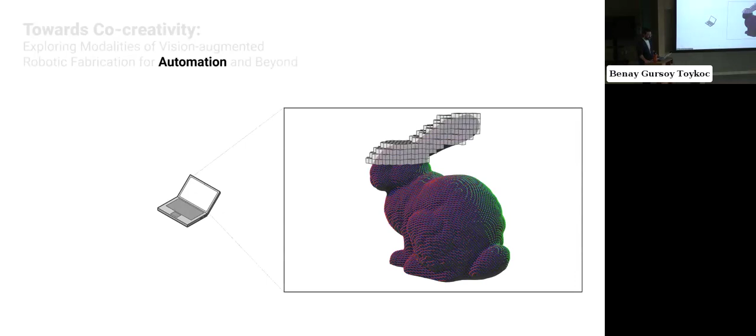But despite their advantage and prevalence, these workflows inherently rely on discrete and often abstracted representations of the design context. This very nature of these computational systems necessitates a conscious effort of defining design problems and discretizing design parameters into computable chunks, which effectively imposes a certain way of engaging with the design context. Not necessarily good or bad, but a certain, typically different, way of interacting with it.

This limitation is especially clear in digital fabrication workflows, where we rely on geometric assumptions to represent the environments we operate in and the materials we engage with. However, these assumptions rarely reflect the true state of the material context and present significant limitations, even when we're using the most advanced robotic manipulators.

Even in an optimal case, where we're using highly engineered materials and well-established fabrication techniques, the materialization quality still remains indeterminate, as the inherent material behavior and the complex tool-material interactions present a wide range of uncertainties.

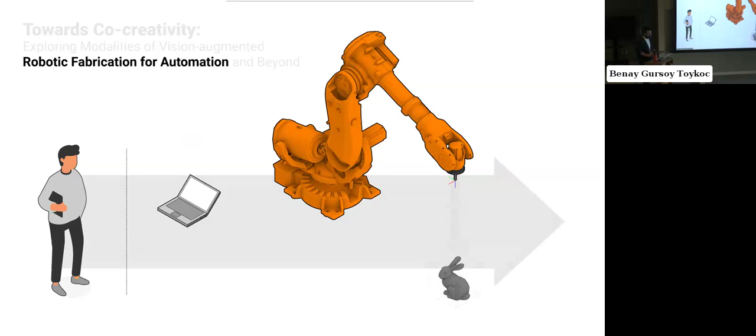To compound this further, due to the reliance on unidirectional flow of information from ideation to representation to materialization, these systems cannot facilitate the level of adaptability inherent in how we engage with design and materialization problems through a series of seeing, acting, and seeing.

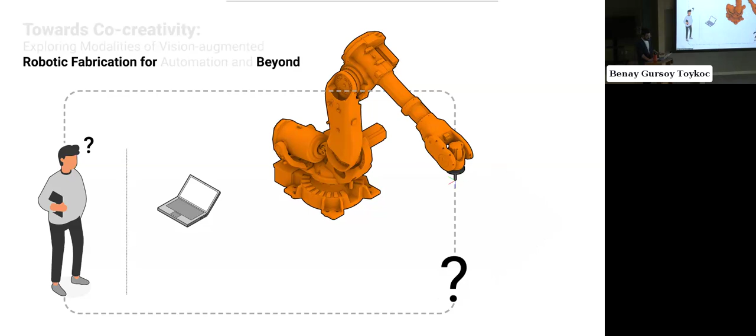This lack of adaptability to the material context creates major challenges for using these systems beyond simple automation. When the final design is uncertain, or the quality of materialization is unpredictable due to complex material behavior, these systems struggle very much. Such situations might include hands-on exploration of material properties or affordances, or using non-standard materials and fabrication techniques, which inherently conflict with the abstract and rigid nature of computational systems.

Within this problem definition, I'm interested in the recently emerging concept of co-creativity within the scope of materialization processes. Drawing from human-computer interaction literature, this paradigm reconsiders computational systems as active agents capable of inferring operational context and appropriately adjusting the computational hypothesis. In simpler terms, my dissertation advocates for computational augmentation of robotic fabrication systems to elevate these systems beyond mere executors of predefined tasks.

In simpler terms, my dissertation advocates for computational augmentation of robotic fabrication systems to elevate these systems beyond mere executors of predefined tasks into adaptive collaborators capable of sensing and responding to the material context.

Especially with recent advancements in sensing technologies, deep learning-based perception models, and heuristically learned action policies, the current technological landscape presents rich grounds for exploring more adaptable and responsive computational systems. However, when it comes to manipulating the physical world, these novel computational approaches are still at an experimental stage, often dealing with what's called toy problems. Therefore, achieving co-creativity in materialization scenarios is a distant but rapidly approaching goal, which guides my exploration of advanced robotic fabrication workflows that can respond to intricacies of the material context.

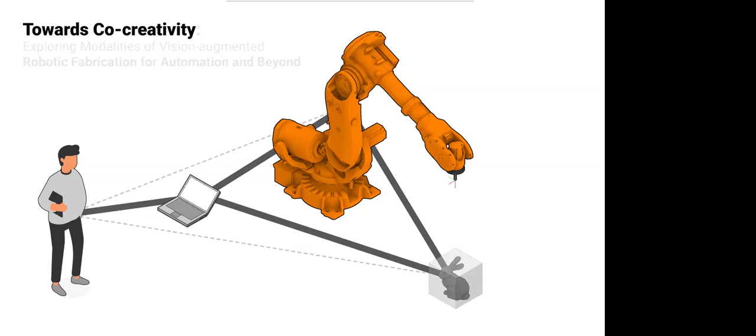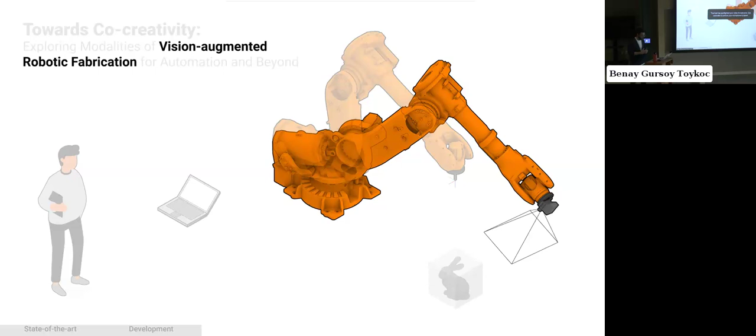Within the scope of this dissertation, my focus explores how to create computational feedback loops that connect digital representation, robotic materialization, and most importantly, the material context, all overseen by a human agent. To achieve this, my primary focus has been integrating computer vision methodologies into robotic fabrication workflows to facilitate an intrinsic representation of the environment for informed tooling operations. In the coming sections, I'll present my findings on state-of-the-art applications and discuss the development of the computational systems that enable such augmentation.

Within the scope of my dissertation work, I delineate three modalities in which vision-based sensing paradigms can augment existing materialization scenarios. The first of these modalities is informing computational systems of the existing material context. Within this scope, I explore how accurately and reliably we can sense the environment, identify key operational parameters and computational strategies for effective deployment, and demonstrate scalability to large-scale applications.

The second modality involves adapting tooling operations based on the captured state of the environment and responding to changes happening within the work cell. This section explores fabrication feasibility for both small and large-scale applications and develops computational strategies necessary for effective materialization.

And the last modality focuses on using vision-based sensing to capture the materialized artifacts and assess the quality of materialization. I explore its feasibility in high-precision monitoring tasks and quantifying material behavior in novel fabrication scenarios.

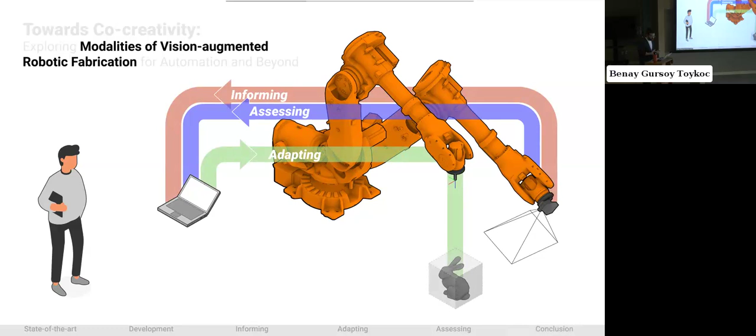Cumulatively, these three modalities mimic the see, sense, act, see paradigm in how we engage with the material and design context, aiming to facilitate a more adaptive and iterative digital fabrication workflow. Moreover, this framework structures how the research outcomes will be presented today. Although this is a compilation-style dissertation where each chapter corresponds to a published or under-review paper, these modalities were essential for meaningfully situating my findings.

Starting with the state-of-the-art applications employing vision-based sensing, the systematic literature review presented as part of this dissertation adopts a rigorous search keyword framework. This approach has been critical in adequately surveying this emerging field, which currently lacks coherence in terminology. This search resulted in 94 papers dispersed worldwide with a significant concentration of efforts in Central and Northern Europe, as well as North America.

Despite the fact that no date limits were set in our search, the selected corpus indicates that this area of focus emerged in the early 2010s, coinciding with the commercial availability of computer vision hardware like Microsoft Kinect, as well as open source efforts that support it.

From 2012 onwards, we see a significant increase in research output, with conferences being the most prominent outlet, highlighting the rapid pace of progression in the field. However, there's a significant shift towards more thorough delineation of findings through more extensive journal publications in the past few years.

In analyzing this corpus, this literature review presents a Vision-Augmented Robotic Fabrication framework, which identifies and delineates implementation and operation considerations critical to effective deployment of these systems.

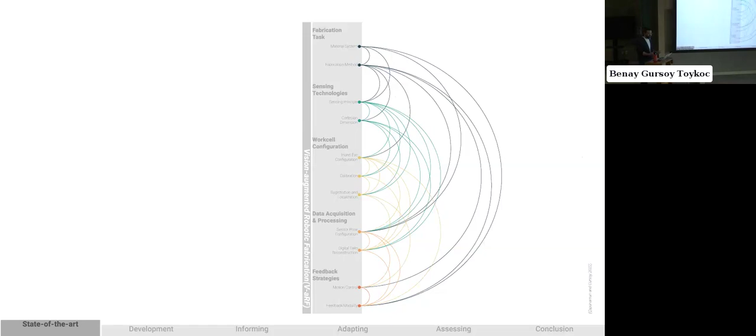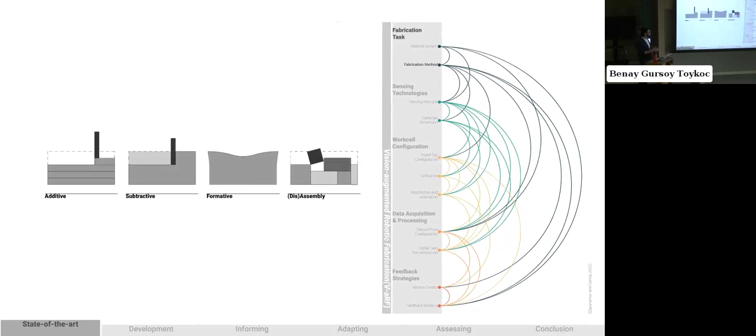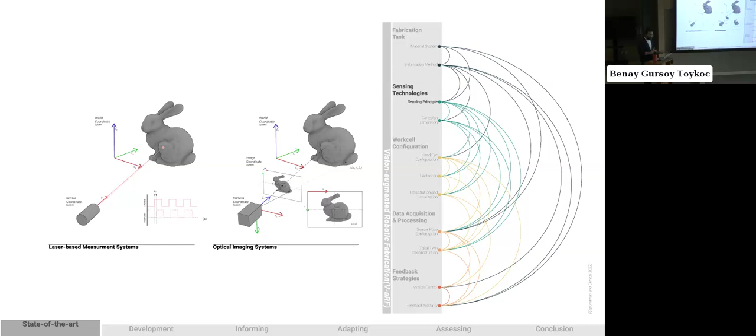Within this framework, the selected precedents are categorized by their fabrication methods as additive, subtractive, formative, and disassembly/assembly. Similarly, sensing technologies are also grouped based on their sensing principle as laser-based measurements and optical imaging systems.

Moving on to operational configurations, this literature review examines how sensing hardware is employed within the robotic work cell. Here, my categorization borrows from the literature in robotics, where these configurations are typically divided into eye-in-hand or eye-to-hand configurations.

In addition, I define common computational strategies to accurately register spatial information with respect to a known coordinate frame, such as the robot base.

Regarding how the environment is sampled in these precedents, I categorize the identified strategies based on the permitted degrees of freedom between camera poses, as shown here.

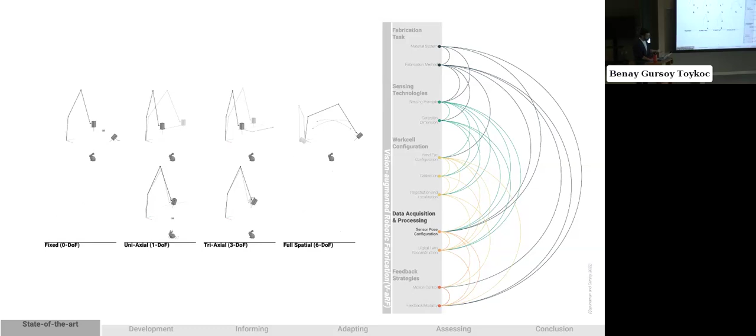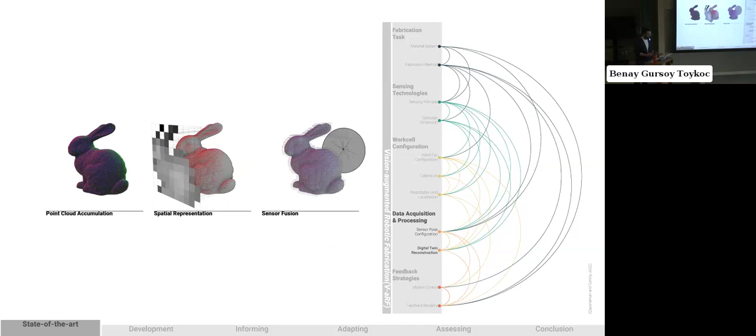Especially in applications where the environment is sampled using more than one camera pose, the integration of these spatial data becomes very critical. Here, this literature review also identifies high-level strategies adopted in the corpus, such as point cloud accumulation, spatial representations, and sensor fusion algorithms.

Lastly, I categorize the modalities in which these robotic fabrication systems operate as deterministic, or single cycle, iterative or multi-cycle, and continuous or real-time.

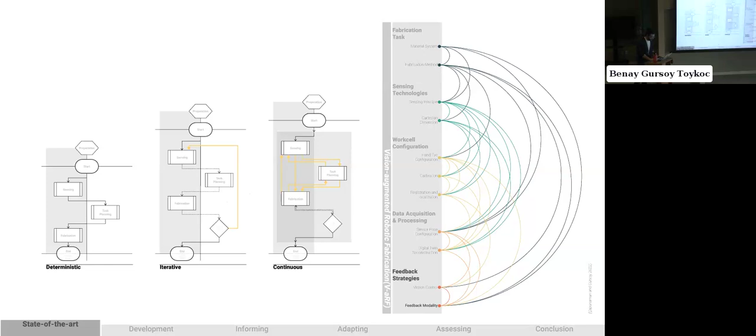Through this detailed examination of the state-of-the-art methodologies and strategies, I identified several gaps in knowledge, including inadequate discussion of computational systems and strategies, limited systematic investigation into operational parameters, scarcity of quantitative assessment of perception accuracy, and lack of open source implementation for better replicability. These findings inform the development of the vision-based sensing framework presented in this dissertation.

As part of this development stage, I developed and prototyped a hardware assembly, which includes an NVIDIA Jetson edge computing device and a Microsoft Azure Kinect developer kit. This allowed us to interface with the robot using Jetson's digital pins to ensure synchronized acquisition of data at precise camera poses.

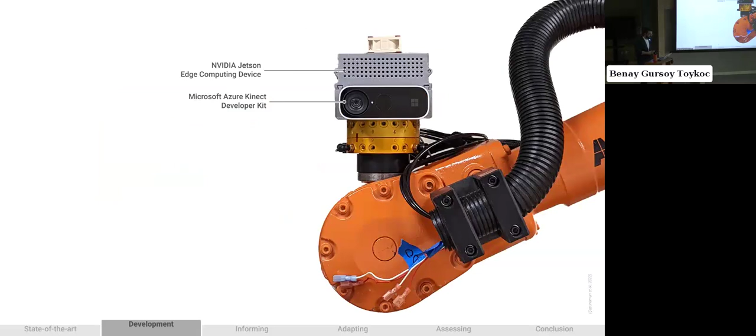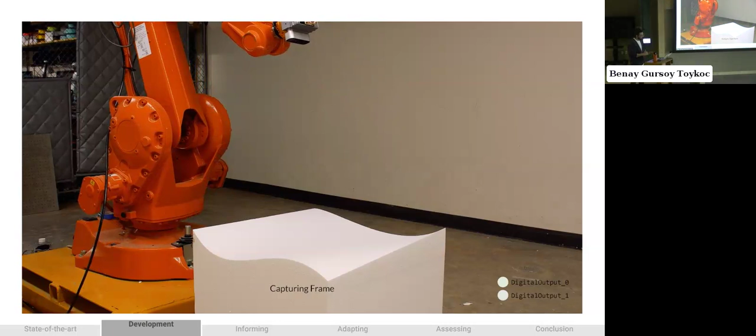Here you can see an example run with the camera assembly. At the bottom, you can see the digital signals in real time and the state of the scanning procedure. In this example, digital output 0 triggers the start and end of a scanning procedure, while digital output 1 is used to capture an individual frame at a known position.

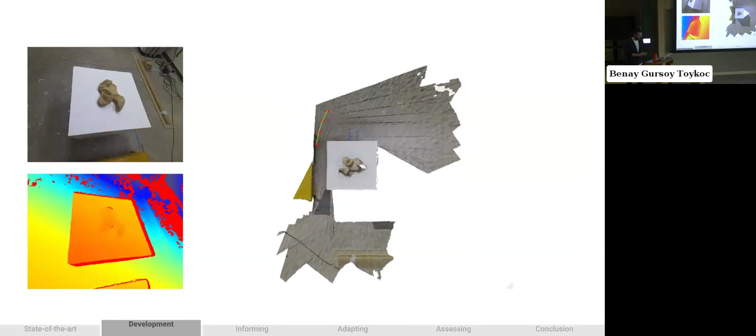And the other major leg of this development process was the scene reconstruction algorithm. For this challenge, I opted for a voxel-based integration algorithm developed by my collaborator Wei Dong as part of his PhD dissertation. This approach was critical in the success of this development phase, as it utilizes hardware acceleration for efficient integration of multi-view spatial data, as exemplified here.

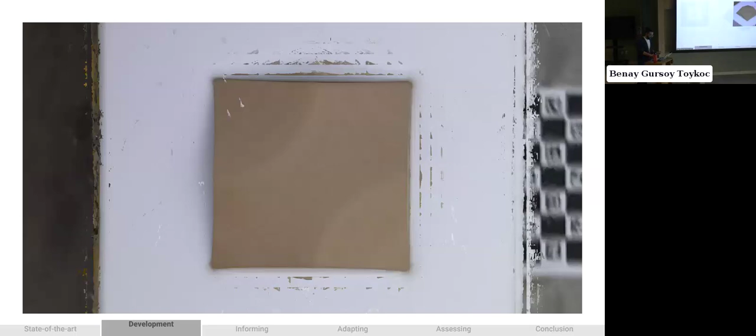However, this integration algorithm alone is not quite enough to produce operable geometries needed for toolpath generation and so on. Here you can see some of the artifacts caused by sensor noise and imprecision in sensor pose estimation during the integration process. Luckily, this is a well-studied problem in the field of computer graphics, and by using an outlier removal algorithm, I was able to achieve clean geometries.

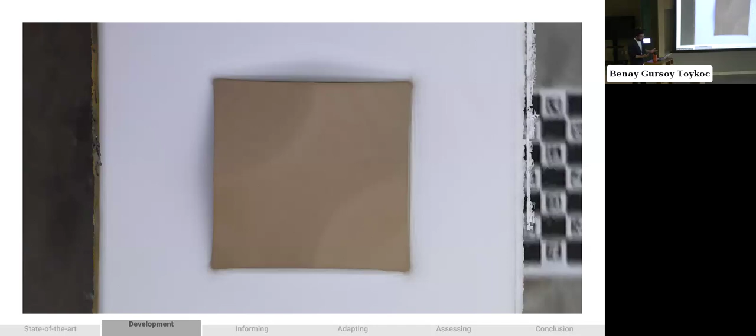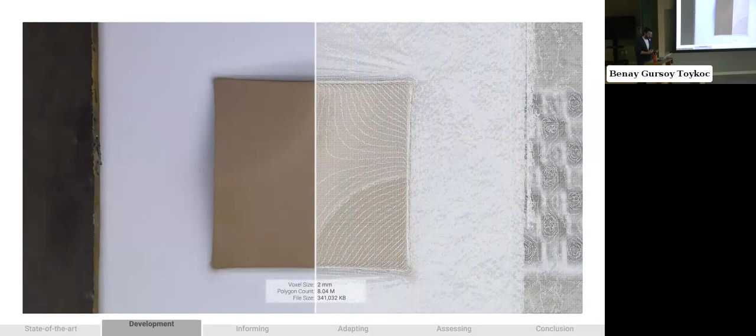And if we were to look closely at this mesh, we can see that the details are very well preserved, successfully capturing the overall geometry. This particular output is reconstructed using a voxel size of 2 millimeters and consists of more than 8 million polygons for the whole scene. And for those of you who do not really deal with mesh geometries on a regular basis, that's a lot of faces.

Luckily, this spatial hashing approach allows for tuning of reconstruction resolution to match the accuracy needs of specific contexts. As we can change the voxel sizes, the flexibility presents significant advantages both in terms of computational efficiency and scalability at large. This successful implementation of hardware and software components marked the first major milestone of my dissertation research, setting the stage for extensive exploration of its capabilities.

Following this development stage, this vision-based sensing framework was validated across different material systems and fabrication scales. From left to right, the first journal publication included in this dissertation investigates the accuracy of digital twin reconstructions and fabrication feasibility of informed tooling operations at small scale.

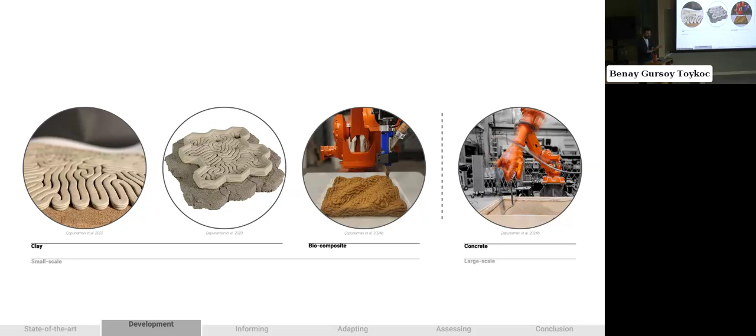Next, conference proceedings explore the use of reconfigurable and reusable formworks enabled by vision feedback through a proof of concept case study. The third conference proceeding integrates vision-based sensing to quantify post-fabrication deformation of mycelium-based biocomposites as part of an internal collaboration at Format Lab. And lastly, as part of the collaboration with the AdCon lab at Penn State, a large-scale validation study explores operational scalability to large-scale 3D printing concrete applications.

Within the scope of this first modality identified as part of my dissertation, my goal was to assess the reconstruction accuracy and reliability, as well as to identify operational parameters and develop computational strategies. The research questions guiding this investigation are: how accurately can we sense and digitally reconstruct the work environment? How do operational variables impact the accuracy and reliability? How effectively can these strategies be scaled to large-scale applications?

To methodically assess the validity of the system that I developed, I also developed an experimental methodology comparing robotically fabricated surfaces against both the scanned mesh as well as the original NURBS surface. Here, the goal is to infer both the accuracy of robotic materialization and respective digital reconstructions, effectively investigating whether vision-based sensing feedback can match or beat our assumptions about the material context.

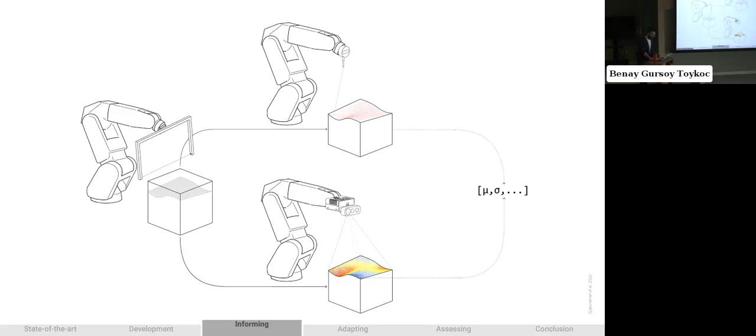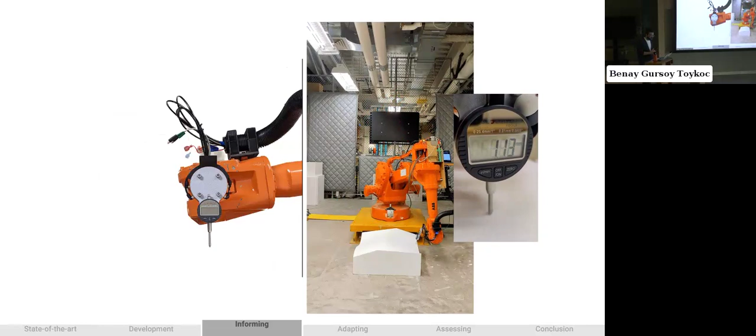Using a hot wire cutter, we first fabricated surface geometries out of a 60 centimeter by 60 centimeter EPS foam block as shown here. These surfaces were then probed with a contact-based measurement approach using a digital dial indicator with an accuracy of 0.01 millimeters, densely sampling the surface roughly every 15 millimeters along cardinal axes. All the target points were programmed to probe 10 millimeters deep to allow for measuring signed error within the measurement range of the digital dial indicator.

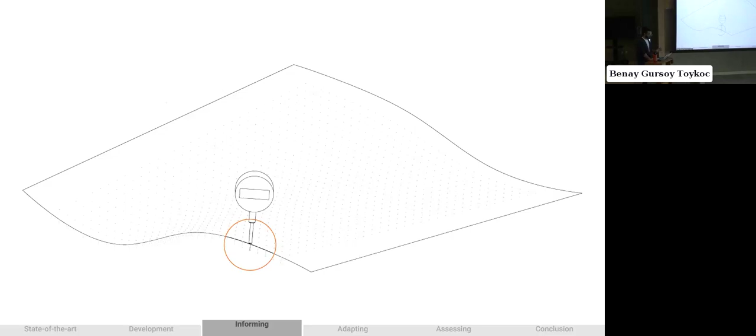If we take a closer look at an individual robot target, we can see that the discrepancy between the known offset amount and the measurements taken from the dial probe gives us the error between the digital master and the physical surface. And by projecting these points along the surface normal vector, we can also calculate the error between the reconstructed mesh and the physical surface as well.

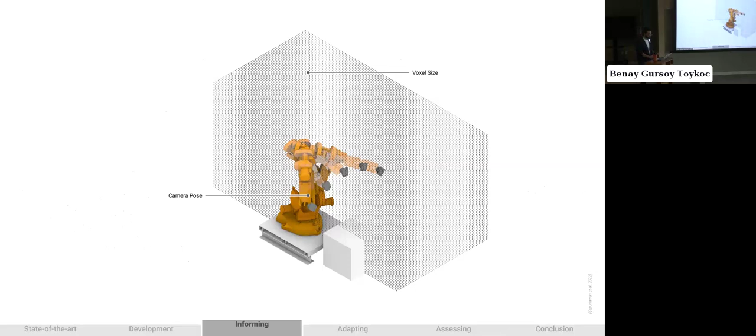Using this methodology, we investigated two operational and computational parameters, namely the effect of camera pose count and voxel sizes on reconstruction quality. To systematically explore camera pose density, we adopted a hemispherical scan trajectory with ample distance between the scanned surface and the camera to avoid any clipping of spatial information due to hardware intrinsic limitations. This hemispherical scan trajectory was defined by angles scanned in YZ and XZ planes to 60 and 90 degrees respectively for robot posability, with camera pose densities ranging from sparse 2x2 capture all the way up to 16 by 16 captures.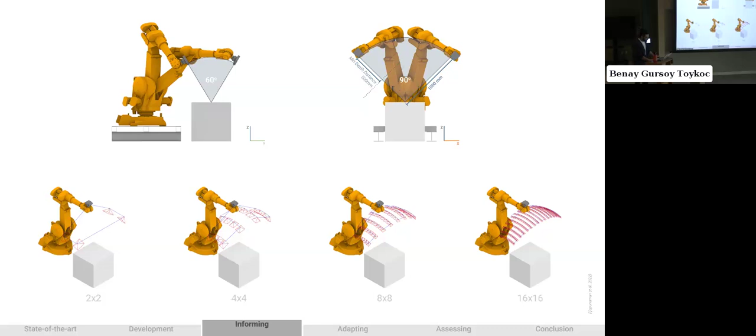As for the reconstruction resolution, we describe the unit voxel size as the number of divisions per unit length. Here, a single voxel represents the smallest computable unit in which we operate.

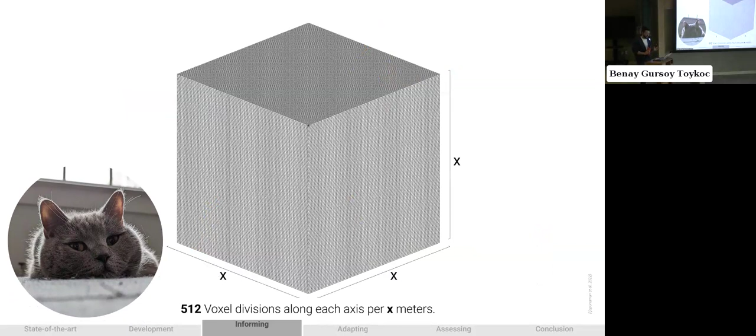And there is also my cat voxel, which is like the silliest and tiniest unit in my life, but that's a whole topic for another presentation.

Coming back to today's topic, we define a single voxel size as x over 512 meters. In our experiments, we use x values of 1, 1.5, and 2 meters, which corresponds to roughly 1.9, 2.9, and 3.9 millimeter resolution accuracy, respectively.

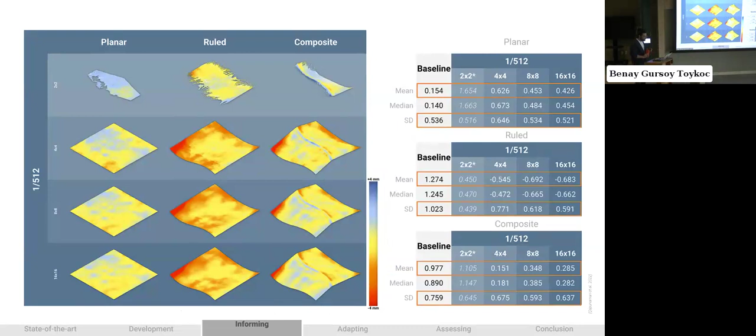Here you can see the visualization of a reconstructed mesh colored by distance to the probed points. With this color mapping, the color yellow indicates no deviation, and the colors blue and red represent deviation in positive and negative directions along the surface normal, respectively.

Here we see that as the number of poses gets larger, we achieve much closer results to the physical surface, as we would expect. However, beyond the 8x8 pose configuration, at least in the scale that we were working at, we observed diminishing returns in accuracy gains. From these results, we can infer that the reconstructed meshes provide as good or better results when compared to the assumptions that the physical surface is true to its digital master.

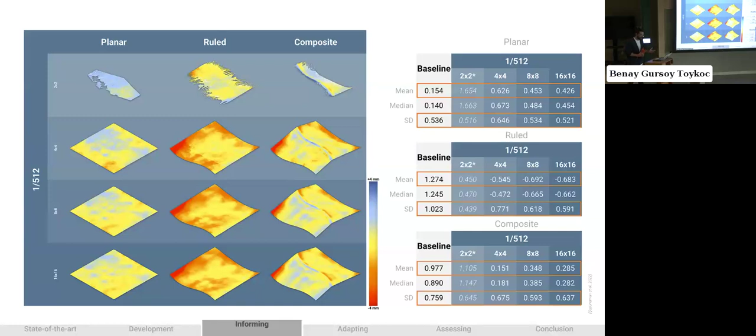Building upon this solid foundation, our collaboration with Adcon Lab at Penn State explored how vision-based sensing systems operate in large-scale 3D printing concrete applications in an emulated, still controlled environment, with emulated site conditions using sand and gravel print surfaces.

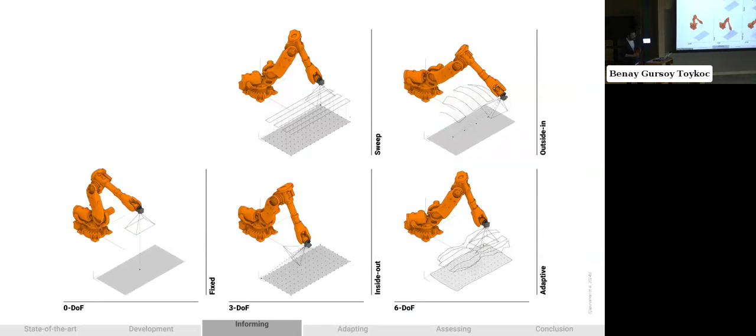This shift in scale is challenging, not only due to the increase in the volume of spatial data, but also because the sheer scale of the application necessitates careful consideration of how the material context is captured.

To systematically explore environment sensing strategies, I structured this investigation based on the permitted degrees of freedom between distinct camera poses, developing 5 sampling strategies as presented here, tailored for 3D concrete printing applications.

Here, the fixed strategy mimics a static placement of the sensing hardware looking top-down to cover the entire aggregate bed at once. The sweep strategy utilizes pure translation motion between poses and isolates the translational accuracy of the robotic arm.

The inside-out strategy primarily relies on rotation around a single point to capture the robotic work cell with minimal kinematic reconfigurations. The outside-in strategy utilizes a hemispherical trajectory, sampling the aggregate bed, looking at 4 points along the major axis of the aggregate bed, aiming to maximize pose variability.

Lastly, the adaptive strategy uses a coarser reconstruction of the aggregate bed to optimally place the sensing hardware in terms of distance and angle to the scanned surface.

Both the sand and gravel print surfaces were scanned across these different strategies, as well as different camera field of view configurations.

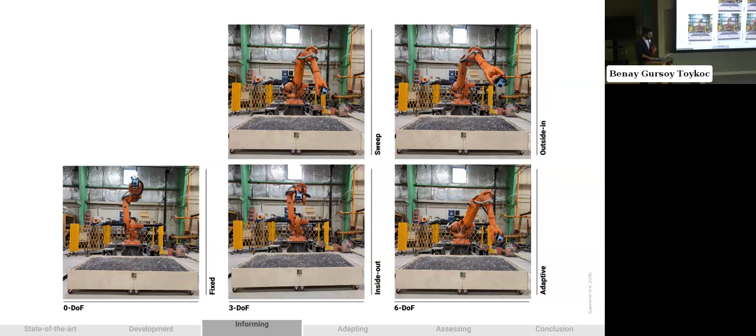But beyond the geometric complexity of these arbitrarily shaped print surfaces, the difference in aggregate size also poses significant challenges in accurately inferring depth, also due to limitations in sensing hardware.

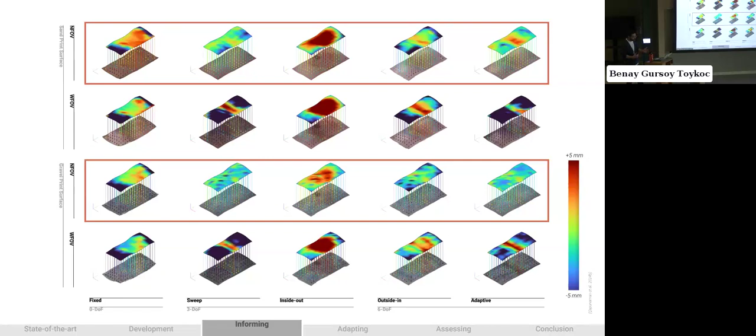And lastly, the outside-in approach presents compelling accuracy results along the major sampling axis, but this accuracy rapidly declines as we move away from the central region.

In addition to sensing strategies, we also tested computational and operational scalability of this framework by systematically reducing the reconstruction resolution and the number of poses. Similar to our previous findings, we observed comparable results despite the reduced computational complexity of the digital twin representation.

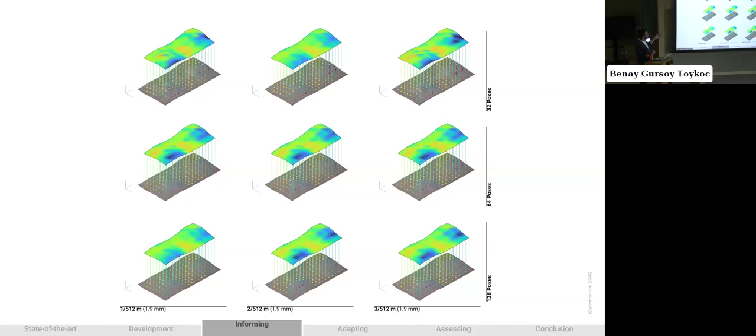Even at a quarter the pose density and a third the resolution shown on the top right, the result is fairly comparable to the original data sets on the bottom left, which uses 128 poses and 1.9 millimeters voxel size.

Going back to the research questions guiding this exploration, I can safely say that the contact-based validation methodology presented here provides a robust baseline to assess digital twin reconstructions. Material, computational, and operational parameters are critically important in adequately sensing the material context and require thoughtful consideration. Lastly, the presented framework is well capable of operating in large-scale applications with high computational efficiency. However, this transition necessitates additional computational strategies to address scale-related complications.

Moving on to adapting, as part of this second modality explored within this dissertation, I explored how the inferred geometric information can be used to inform robotic fabrication tasks and conform tooling operations to existing conditions. Here, my investigations were guided by: one, how feasible is vision-informed conformal tooling on unknown surfaces? Two, what kind of opportunities do such advanced tooling capabilities hold? And three, is this conformal tooling strategy feasible in large-scale applications?

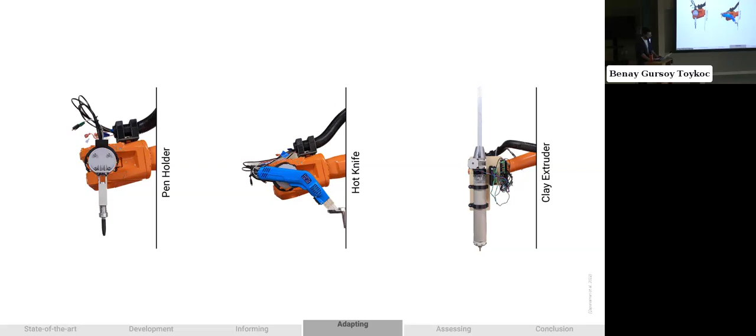As part of the small-scale validation study, we explored various tooling operations, including pen plotting, hot knife carving, and 3D printing clay as an early investigation into this capability. Using these end-of-arm tools, we ran simple tool paths across the surface, shown here as an early investigation of how feasible fabrication is with this tool path approach. Although we observed minor deviations in 3D printed layer heights and plunge depths for carving tasks, these deviations were actually consistent with the regions that exhibited lower reconstruction accuracy anyway.

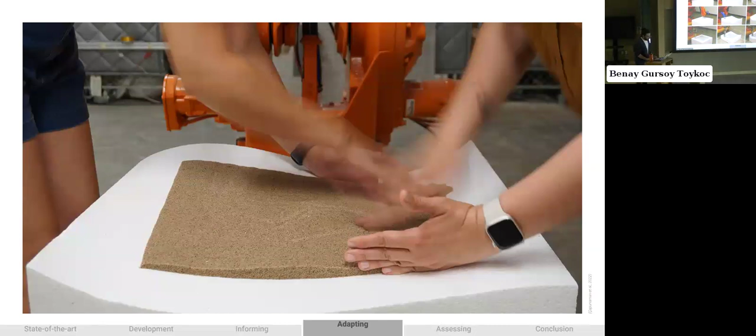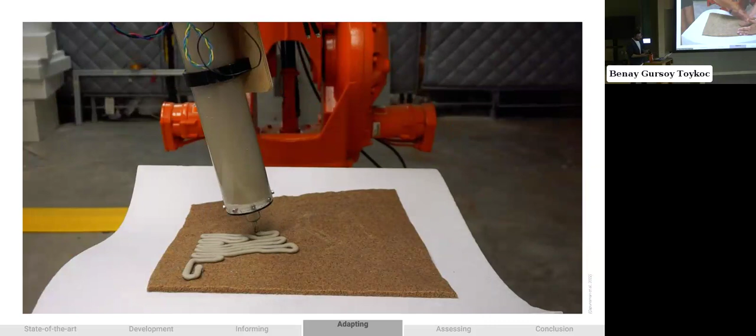However, to add another layer of complexity, we—meaning me, Benay, Paniz—all got our hands dirty and created an arbitrarily shaped surface just to test the system on a more challenging topology. This surface was then scanned to inform conformal material deposition using a differential growth curve algorithm. In line with other tooling tests on known surfaces, this was also a major success where we were able to 3D print on the unknown surface geometry with high precision.

Here you can see the final printed artifact, and during the printing process we observed consistent material deposition with no visible over or under extrusion across the entire print trajectory, even at 4 millimeters layer height that we were operating in.

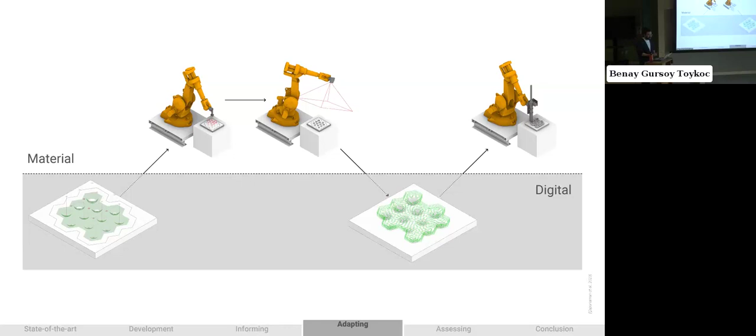Finding out this newly found capability, to further explore this newly introduced capability of conformal material deposition on digitally unknown surfaces, we conducted a follow-up study that investigates how vision-augmented robotic fabrication workflows enable adoption of reconfigurable and reusable sand formworks. Here, the robot is used to parametrically manipulate the reconfigurable sand formwork, capture the resulting material expression, and use this geometric information to adapt tooling operations.

As part of this case study, we adopted a very simple modular wall section design as a proof of concept, informed by the constraints in available extruder and the ceramic firing kilns. Out of these panels, we selected one characterized by a wide range of plunge depths as shown here.

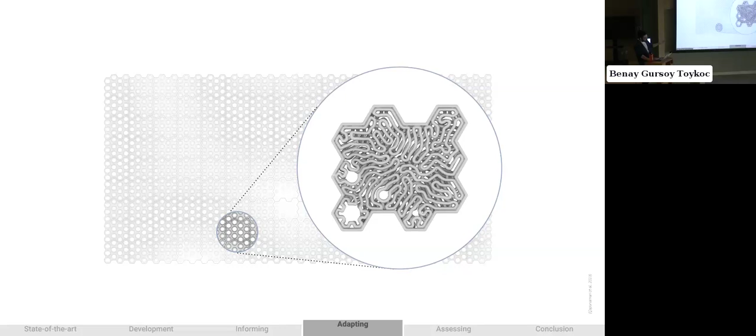Together with our collaborator, Emily Eisman from the School of Visual Arts at Penn State, we developed a special sand mixture that holds its shape when compacted, but can be fired in the ceramic kiln safely to provide support during the transport and firing process, and can be reclaimed afterwards.

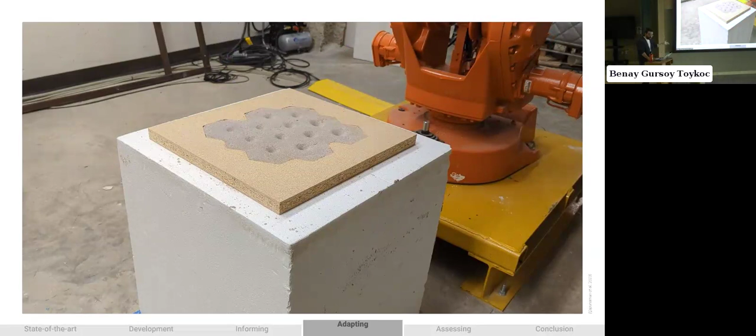Here you can see the formative shaping of the sand mixture by the robotic arm. However, this formative process exhibits varying levels of materialization uncertainties. For example, sand springs back when pushed, making it difficult to anticipate the resulting geometry, which necessitates a more active approach to capture the state of the formwork, in which we utilize vision-based sensing to geometrically reconstruct the formwork.

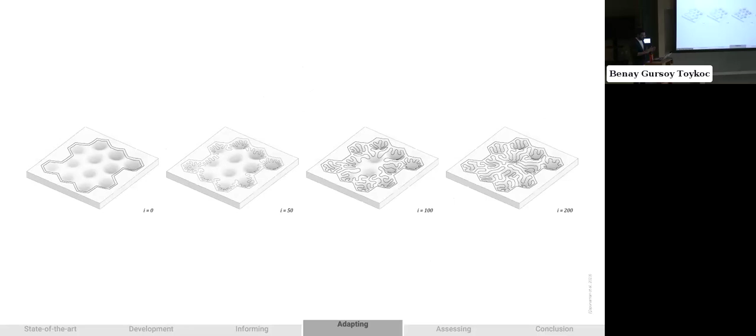This geometric reconstruction was then used in generating conformal toolpaths. To facilitate effective material deposition, we refined our toolpath generation approach using differential growth curves to allow for more precise control over the geodesic spacing of the laid material filaments. Additionally, we incorporated a very simple post-correction approach to ensure smooth and collision-free execution, especially around regions of high curvature, as shown here.

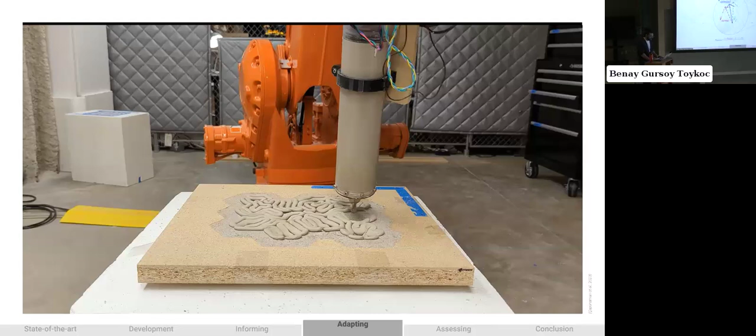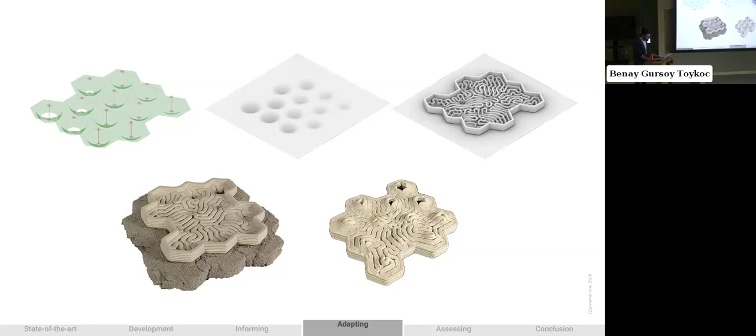In addition to these small-scale explorations, the conformal tooling capabilities were also tested in large-scale 3D concrete printing scenarios. In such in-situ applications, site conditions are almost never optimal, and the ability to conform material deposition presents a promising opportunity to enhance the applicability of such technologies at large.

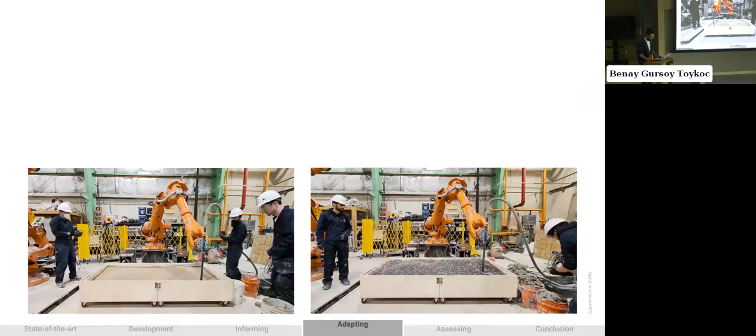Together with collaborators from the ADCON lab, we were able to successfully execute conformal material deposition on arbitrarily shaped sand and gravel print surfaces using a simple meandering path. During the printing process, we did not observe any significant problems aside from oscillations induced by rapid changes in

movement speed and direction, and the extruded material closely conformed to the printed print surfaces. Additionally, these extruded material filaments were also measured by hand using a caliper to assess the quality of conformal toolpath generation, using a very naive assumption that material deposition rate is constant and the layer height and width are inversely proportional.

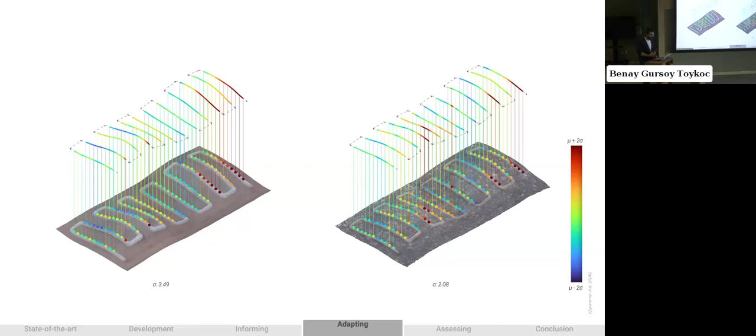When we distributed the materialization errors along the toolpath, we observed consistent material deposition aside from some localized errors, especially on the farther side. However, we think that this can be tentatively linked to some errors that we observed in the positional and rotational accuracy of the robotic arm that we were using for these experiments.

Overall, these results demonstrate that informed tooling of unknown surfaces is well within the capabilities of such vision-augmented robotic fabrication workflows. Moreover, we exemplify that this capability opens up novel opportunities in materialization, such as using reconfigurable aggregate-based formworks or tooling on found materials.

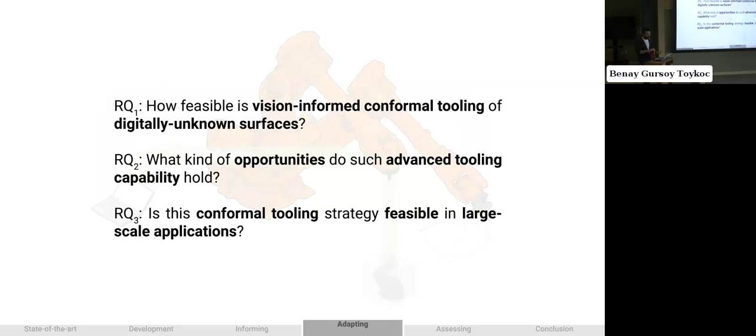Despite the added challenges of large-scale materialization, like I mentioned just earlier, we successfully apply these strategies in 3D concrete printing applications as well.

The last vision-augmented robotic fabrication modality explored as part of my dissertation aims to investigate the potential of vision-based sensing systems in monitoring tasks.

The underlying research questions for this phase of my inquiry are: one, can we infer materialization accuracy from reconstructed digital twins? Can we actually trust this information? Two, how can we identify systematic errors inherent in the materialization process? And question three, can we use digital twins to monitor material behavior of novel material systems?

As part of the validation efforts in large-scale 3D concrete printing applications, we explored the precision at which we can infer the materialization quality of the conformally printed meandering filaments.

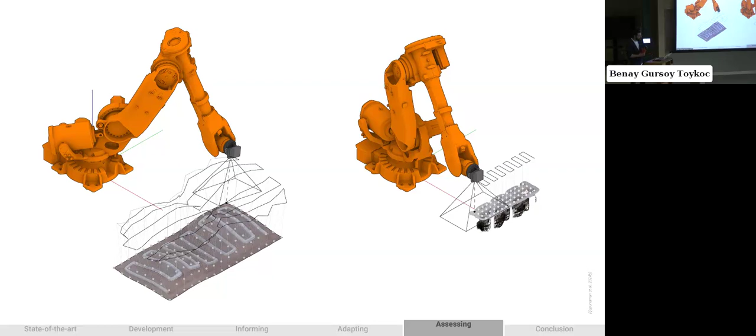In addition to these conformal first layer deposition scenarios, we also 3D printed a multi-layer wall section, of which we captured the top layer for a similar analysis.

Using previously known toolpaths as the ground truth, we explored how effectively the reconstructed digital twin can capture the deposited material. In the conformal first layer deposition scenario, however, we observed significant loss of geometric fidelity due to the lack of depth contrast between the laid material and the background print surface.

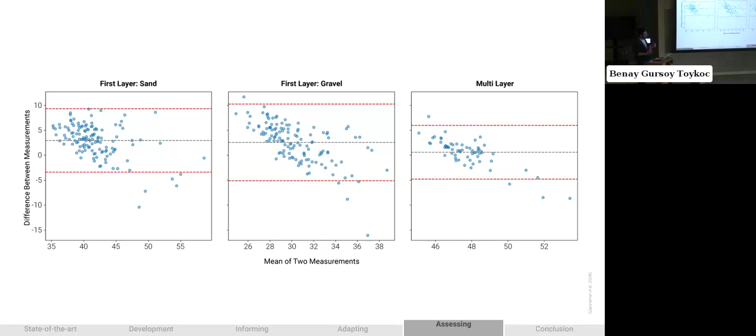Although the multi-layer scenario provided a cleaner signal overall, we observed still significant variability in our geometric decomposition results, especially around the regions where the filaments start overlapping. Across both the first layer experiments as well as the multi-layer scenario, we observed limited agreement between the caliper measurements and geometric decomposition results, which suggests that we still have a little bit more work to do.

In addition to the intra-layer material deposition quality, we also employed the vision-based sensing framework in capturing the 3D printed concrete wall section as a whole to assess global geometric fidelity.

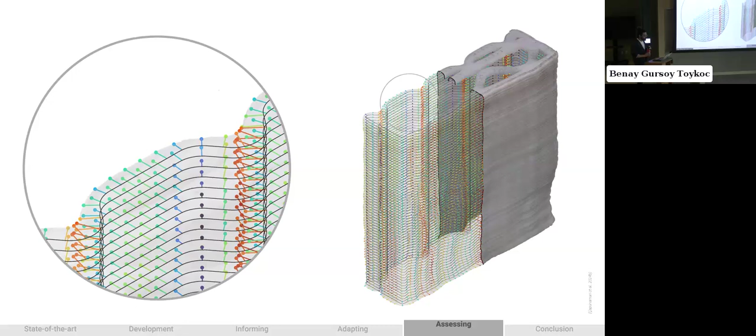Using the known toolpaths again as the ground truth, we were able to calculate how materialization errors localize across this multi-layer structure.

However, by centering the color mapping around the mean deviation of each layer, assuming that the errors on each layer are equally affected by these systematic errors, we were able to isolate the effect of these systematic problems. Here we can identify a number of errors in materialization accuracy, including one, the loss of geometric

fidelity around regions of quick direction change, such as the corners, as well as the loss of geometric fidelity on high frequency features, such as the one shown on the southeast view, where you see a bunch of reds and blues that kind of emerge along the little perturbations.

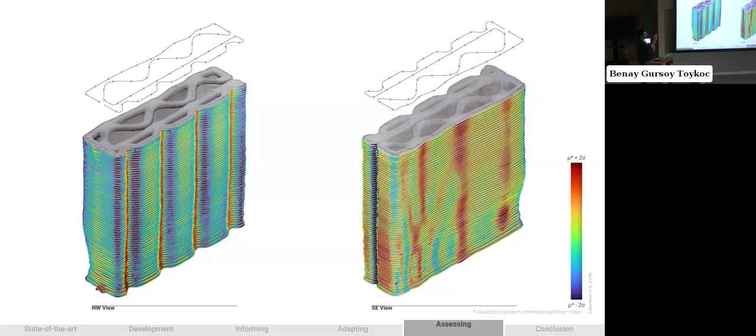In addition to high precision monitoring tasks explored in 3D concrete printing, the vision-based reconstruction was also integrated in post-fabrication monitoring of mycelium-based acoustic panels as part of an internal collaboration within the Format Lab. Here, the anisotropic nature of this novel material system presents significant challenges, as such composite materials exhibit significant deformations post-fabrication.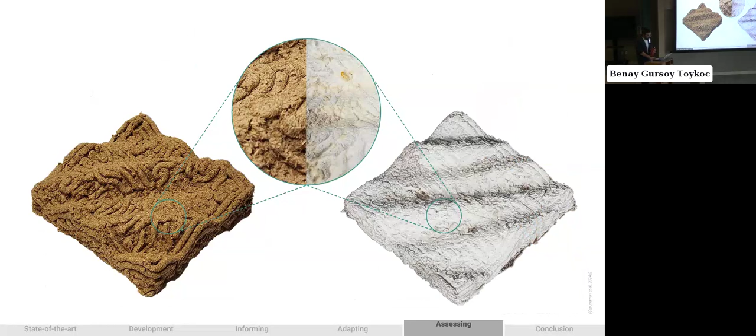By scanning and reconstructing digital twins at distinct post-fabrication stages, as shown here, we were able to quantify both materialization error, as illustrated by the 1-2 pair, as well as the cumulative deformation as presented in the 1-5 pair.

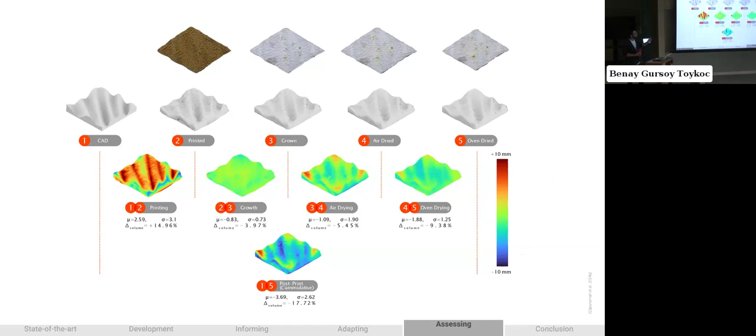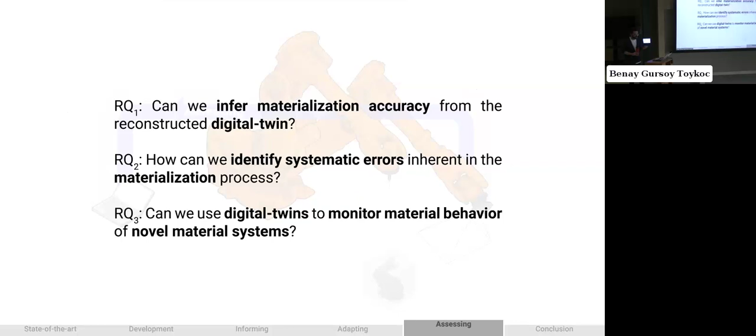Through this investigation into monitoring capabilities of vision-augmented robotic fabrication systems, we demonstrated the feasibility of assessing materialization quality and identifying systematic errors. Although we encountered some systematic errors in large-scale experiments, overall the results present promising leads into how computational systems can effectively capture the impact of their actions in the physical environment.

In conclusion, by investigating these different modalities of vision-augmented robotic fabrication, my dissertation documents the integration of advanced computer vision approaches to inform computational systems of the physical environment. It effectively demonstrates advanced tooling capabilities enabled by vision-based sensing paradigms and explores its immediate applications in small and large-scale materialization scenarios.

Within this broader ambition of this dissertation to advance digital fabrication systems into a collaborative partner, the work presented here lays the groundwork for adequately sensing and appropriately responding to the material context explored through a series of automation tasks.

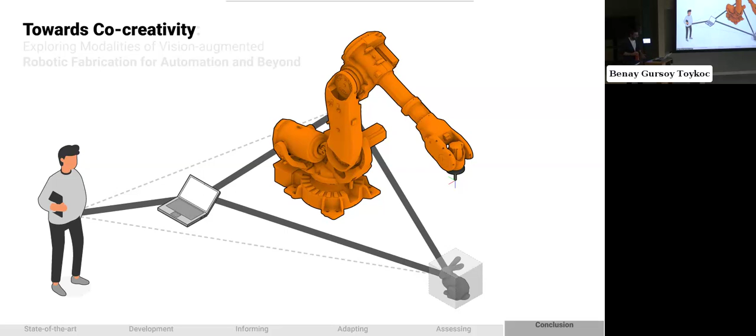In this journey towards co-creativity, closing this first link between the digital and the physical enables a shift towards a computational seeing, moving, seeing paradigm, mimicking how we designers engage with the material and design problems. Although I still believe this goal is a distant one, necessitating computational capabilities beyond what can be feasibly achieved today, this dissertation exemplifies how such incremental advances towards this goal can have immediate impacts in augmenting existing scenarios.

Within the scope of this dissertation, some of the key findings are: one, vision-based sensing frameworks need careful coordination and orchestration of many systems and parameters to work optimally. Two, sensing strategies are key for making these systems accurate and feasible, and they play an important role in how well we can capture the reality.

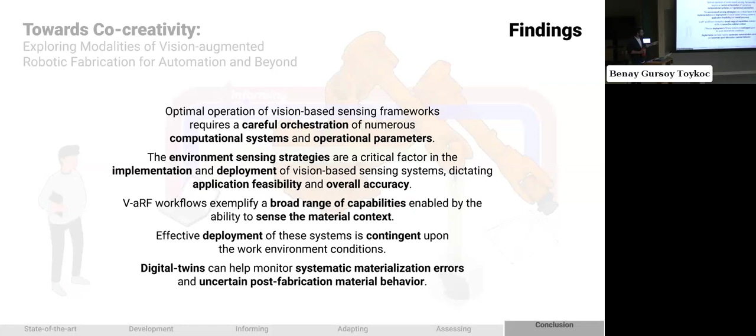Vision-augmented robotic fabrication presents extended materialization abilities by sensing the material context. However, these systems work best right now at least in controlled work environments. Digital twins, we also demonstrated, can help monitor systematic materialization errors and uncertain post-fabrication material behavior.

As part of my dissertation, some of the most prominent contributions are: one, the extensive review of vision-based sensing feedback loop in architecture robotic fabrication, which actually got accepted just yesterday, literally.

Development, documentation, and open source sharing of vision-based sensing hardware prototypes to enhance replicability and sharing practices across the field. Thorough evaluation of operational accuracy and fabrication feasibility in both small and large-scale applications. Identification of critical operational variables in adequately sensing the environment, and delineation of computational and operational strategies to support such advanced tooling tasks.

However, as with anything good, this dissertation also has some limitations. For example, the generalizability of the results across different material systems and operational conditions is a significant hurdle in adoption at large.

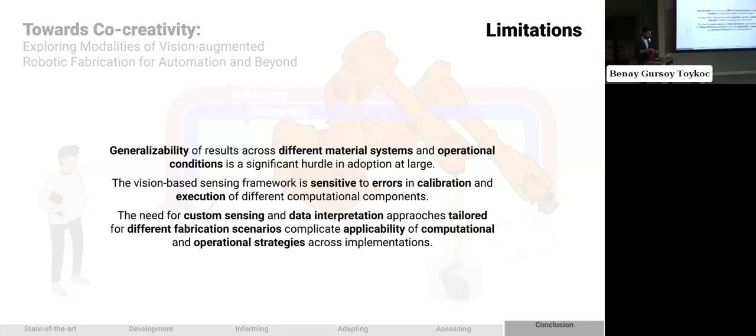The vision-based sensing framework is fairly sensitive to errors in calibration and execution of different computational components, and the need for custom sensing and data interpretation approaches tailored for different fabrication scenarios complicates the applicability of computational and operational strategies across different implementations.

Within the scope of future work enabled by this dissertation, the integration of real-time applications is pivotal. Such integration can significantly enhance the adaptability of robotic fabrication workflows by enabling robots to respond dynamically to changes in their environment, so we can achieve a more dialogic interaction between the robotic systems and the materials that they manipulate.

This adaptive capability is essential for addressing unique challenges presented by different fabrication scenarios, leading to a more precise and open-ended process. Furthermore, exploring reinforcement learning paradigms offers promising avenues for exploration.

These paradigms allow robotic systems to learn heuristically through interaction with the world, and by continuously adapting to feedback, reinforcement learning can help develop novel materialization techniques that are in constant conversation with the material affordances. This means that robots could better understand and predict how materials behave intrinsically, leading to more refined and effective fabrication methodologies.

And lastly, recent advancements in 3D generative models could offer novel capabilities for generating design hypotheses based on the current state of the materialized artifact. This enables a more open-ended exploration through direct engagement with the material, fostering novel design fabrication paradigms.

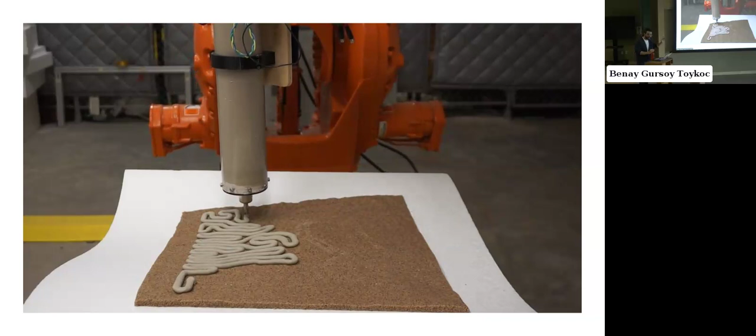Jose, thank you for all the opportunities that you provided within SCDC through collaborations, through teaching opportunities. I really appreciate all these little things that make me a better scholar, I hope. Katie, I hope I was able to do justice to the 10,000 feet views, and I really appreciate you making me pull back up to that level and look at my work again and again.

Chris, finally, I'm really happy to have met you in person, but I really appreciate all the critical questions that come right at the end of all my committee meetings and always spark something in my mind. And Onur, for always being there to remind me why I do what I do, and always trying to nudge me into all these amazingly mind-opening areas.

In addition to all these beautiful people, there are a few others who are not here necessarily, but who made a significant impact in my journey getting to this point. Daniel Cardoso and Joshua Bard, they were incredibly instrumental in helping me conceptualize all of this.

And Mine Özkar, Şebnem Yalınay, their support has been very critical from the get-go. Format Lab members, old and new, Elena, Ali, Pooja, Natalie, Alale, Maniz, Kiran, Kali, Kiara.

I'm proud to be your peer. I really enjoyed working with you guys all, and really appreciate all the fun times we had, and all the little chats we had here and there to get our heads off the work.

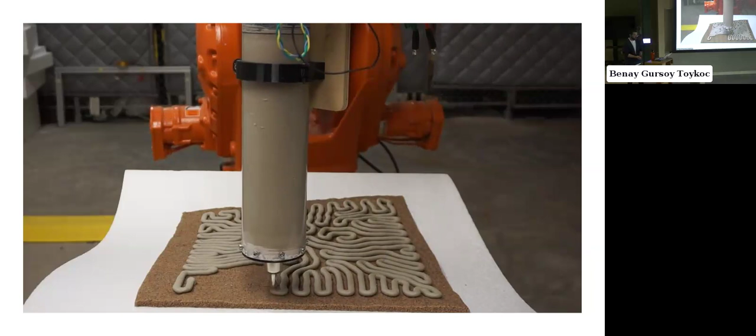People at Autodesk, Erin Bradner and Sachin Chitta first. Thank you for believing in my vision and for your support in my research.

Adam, Yodo, Wei, Nick Carey, Nikot, Sri, Carl, Gabby, Noah, Michael, and all the other people that I'm 100% sure I'm missing some. Thank you all for expanding my perspective and making me love what we do even more.

And amazing people whom I'm lucky to call my peers. Gamze, Koray, Idil, Jimmo, Weiwei, Ardavan, Emek. They're all around the world somewhere, and I really appreciate it.

Well, if you're on Zoom, love it, but if you're not, it's fine. I understand. Life is life.

And friends all over the world. Onur, Khan, Atalay, Yital, Jem, Cici, Ford. I think I'm still missing some, but forgive me for that.

Thank you so much. I always needed one of those moments where I am not a graduate student as much and can really enjoy just the moment itself.

People of SCDC, Alden, New, Julio, Vina, Farzana, Dima, Hanin, Chaudhry, thank you all for lovely chats between work. Marissa, I'm honored to have walked this path with you, and Paula and Steve, I thank you for being my American family throughout this process.

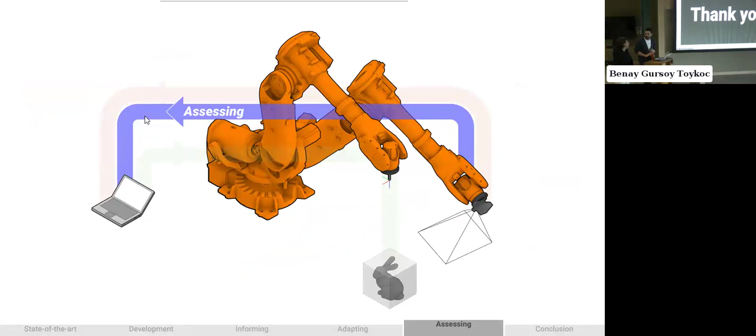Okay, so I would like to open - I would like to ask you, sorry, I got a little bit emotional with that emotional talk. It was good, hey, okay. You started first. I'd like to open the floor to the audience here in person first, but people on Zoom can also type their questions, or if you raise your hand, I can also pull you up among the panelists, so you can ask your question in person. So I'll start with the people in person. Do we have any questions from the audience?

Yes - did you cure and save any of the clay tiles as a memento? There's one, there's one. Yeah, the ones that got fired are perfectly well preserved. But the rest, they kind of crumble away anyways. But I have one.

Somewhat complicated question, but I'll try to boil it down. I assume that you used some existing image processing routines to do the digital reconstruction of the surface from camera views. Correct. Cool.

So if we're trying to assess surface quality, not gross conformance to a preconceived shape, but say local porosity - you mentioned in connection with the gravel bed that you had some problems, due to maybe depth of field, possibly due to insufficient contrast between the printed material and the background. So the question is, did you consider alternative modes of lighting the scene?

So my question was, maybe you can use that knowledge of those tendencies to optimize. But what I'm saying is, we don't necessarily know when we're scanning to print how well we scanned. We can only take a snapshot of it, we'd have to go back and actually touch it with the robot to know how well we captured it. So essentially, I mean it is possible, but then the question becomes, if we're doing a contact-based measurement of the entire surface, why do we even need a vision-based system? Because it's always going to be much more accurate.

Maybe one last question, if we have any from the audience, not from each other.